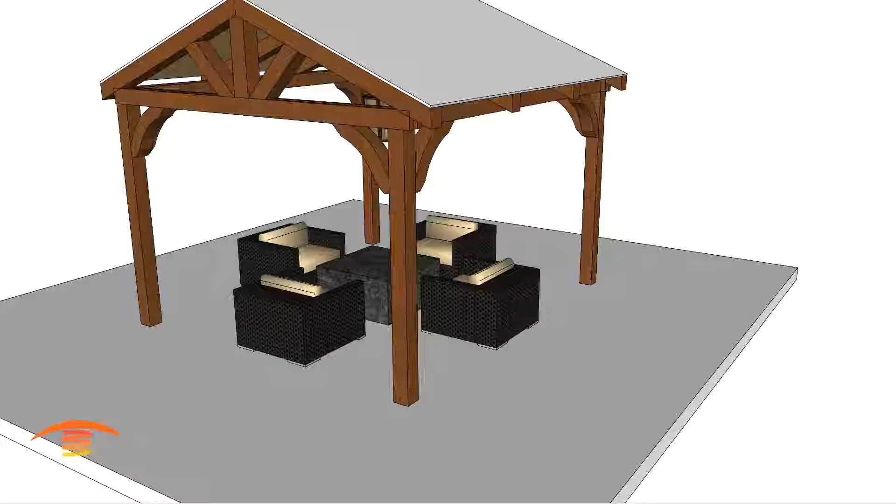Today I'm going to show you this relatively simple but yet elegant design of this residential structure. And being that it's simple and elegant, it has a little bit of complications that I'd like to show. So let's go ahead and see what we have.

First of all, our dimensions. You can see here we have 12 feet by 10 foot 7 and 15/16 of an inch. The bottom edge of, I think these are double beams here coming across, is 7 feet 7 and 7/8 of an inch off the ground. And then the overall height of the structure here at the bottom edge of these pieces here is 9 feet 7 and 5/8. Sorry about that, that ridge line is what I'm talking about. Let's go ahead and turn that off.

So the first option would be to place a couple of units on these outer edges. And this is where the issue starts to become a little bit of an issue. So the main issue that I have is making sure I meet clearances to combustible materials. And these braces here on the edge, they're decorative, but they're also wood, and do present an issue with this dimension of a patio. So let's go ahead and look at what that issue really is.

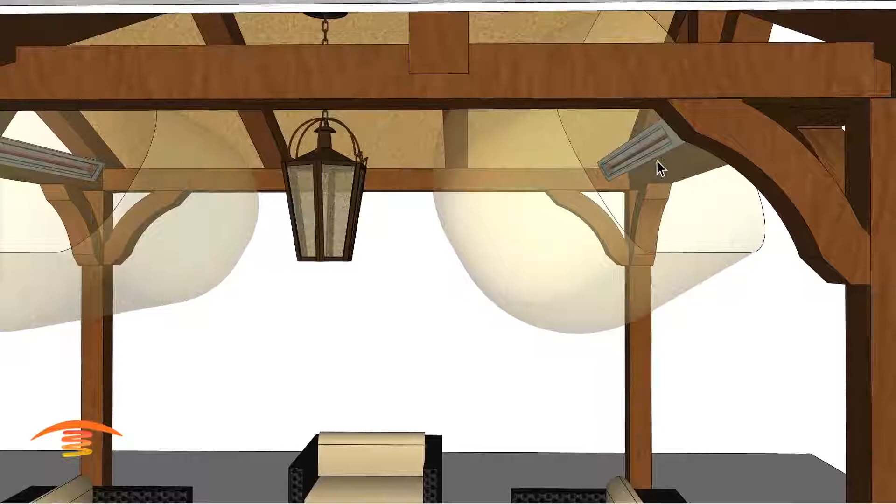So of course, above the heater, well, I have these turned here, but let's skip that for a second and we'll come back to that. Below the heater, I need to maintain 18 inches from the edge of the heater to any combustible. So I think I have these at roughly a 55-degree tilt from pointed straight down. And while that might look okay, it doesn't function correctly. So I'm going to turn that off, but I just want you to see that we do meet the clearances.

So here, let me turn that off, and let's look at the ray itself. So the ray is a light wave, and just like any light source, it emits out from the device. This is a heat source, light ray, infrared. And so as you can see here, I am not really capturing the space that I really need to capture. So let's see if I can reverse what I had here.

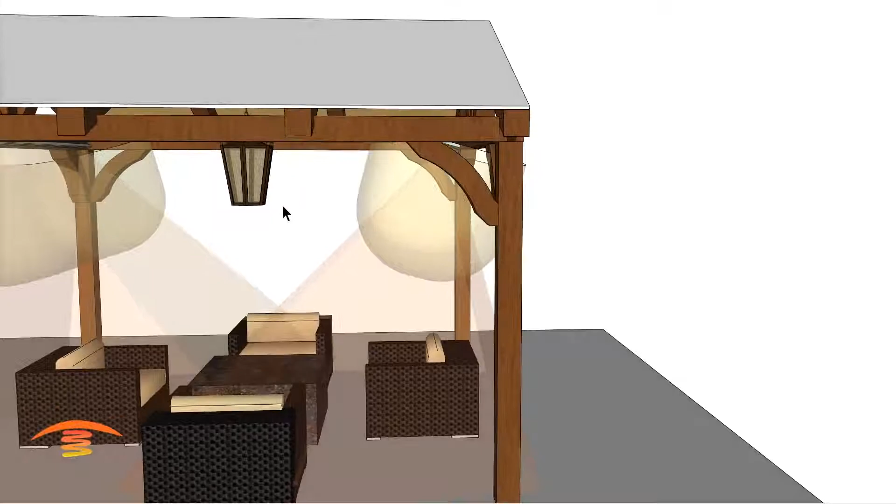Give me 1 second. So this is a 15-degree angle, and that would work well in the patio itself, but I have the issue right here, which is I'm not meeting the clearance to combustible with these decorative braces, so that presents an issue. So the only way I can get away from that is by moving the heater further inwards. That's not the only issue.

The other part of this is that this client is in a very cold winter climate, and so I have these at 4,000 watt units, and I don't think that would be sufficient for this space in such a colder climate. So I'm going to turn this clearance below off, and I'm going to put in 2 more units. These additional units are mounted the same way.

I think the clearance is still an issue below, so let's check that out. You can see that even at this wider edge, I'm just nipping these edges here. So yes, that is still an issue technically. You could go with possibly a longer bracket.

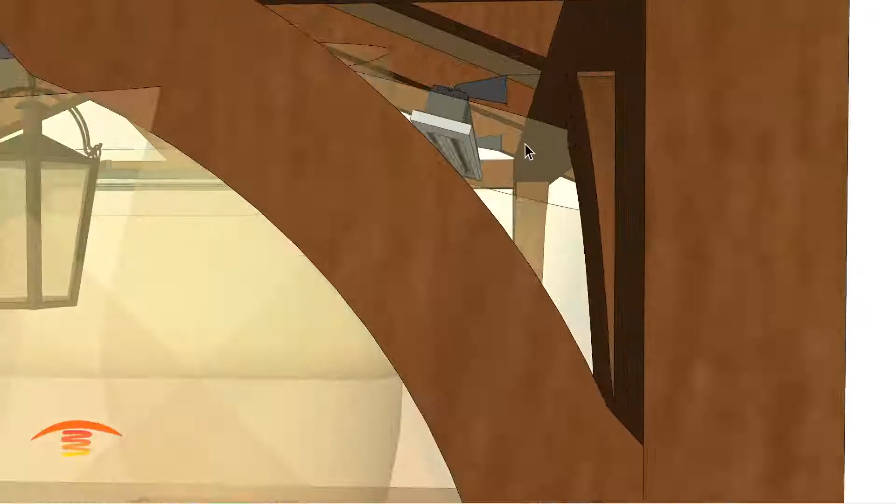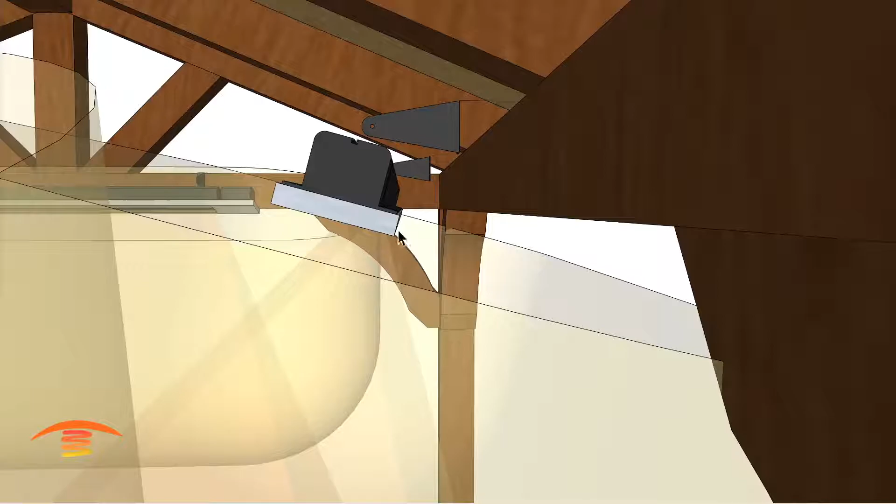I actually have these brackets extended, so you'd have to get the extended bracket even to do what I'm suggesting here, and I have them set up at the very top of the heater, or at the top of the beam here, so that there's the possibility of getting this angle down without lowering the heater itself. So that's a 4-inch extended bracket there, I believe. That's what I have there.

But in any case, this puts a nice footprint of heat, but we just have that one little dilemma here. So let's turn that off, and let's see what if we put some hotter units. These are 6,000 watts. The previous model was a 4,000 watt, but the 6,000 watt obviously has the same issue, and we need to do something about that.

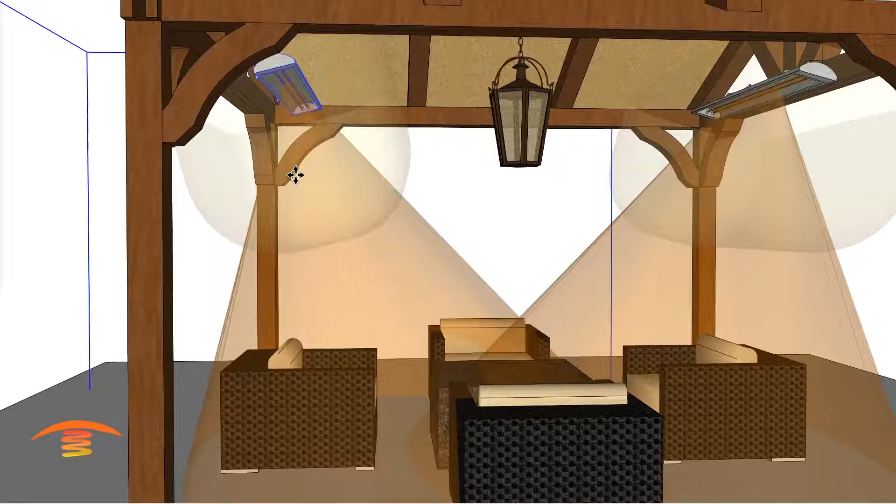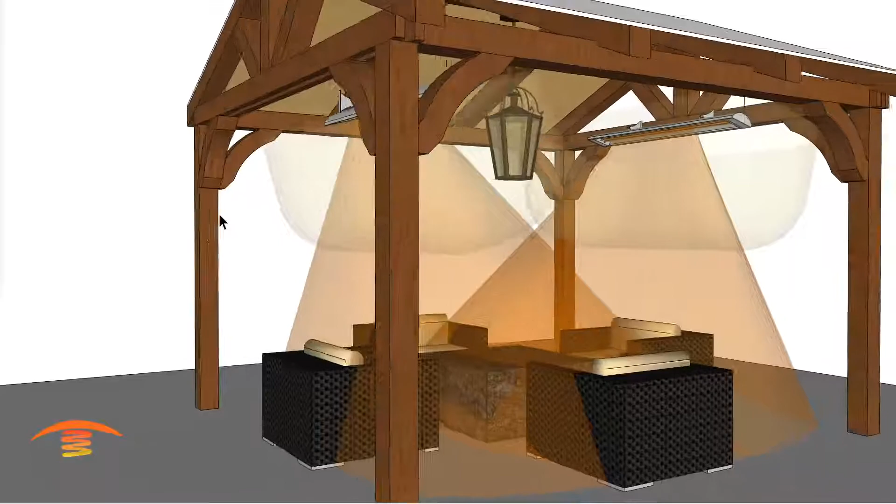And the only thing we could do, like I said, is to move the unit further in so that we're not in that area at all. So if I go, let's see, about 16 inches, I guess, would be good. And with the 16 inches, we're more than clearing that spot. Let's see what it would look like over here.

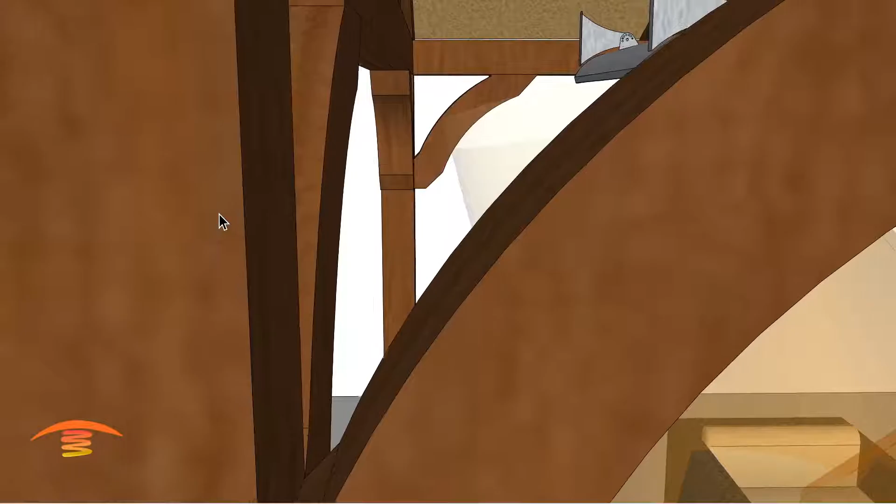I can probably go maybe even 15 inches and be successful, but now our mounting wouldn't really work over this edge here. We'd have to hang the heater from a bracket above, so that would be the proper way of doing that. And then also we may not need to place this angle at 15, maybe only 10 or maybe 5 degrees, because we're having a lot of overlapping here in the center, which I haven't moved this one over, but let's just go with that 15 degree move.

I'm apologizing, this is going to be a very long video for such a simple application.

But so yeah, we have a 15 degree move, or 15 inch move, but you can see all of this overlapping on a very hot unit here. So again, I would want a hotter unit if I could have it, and then have a control system where I can dim it down, but I have that clearance issue. So mounting it from the ceiling, maybe on some extended chain, or you can modify the bracket and add an extender piece onto the bracket itself, would be useful. So that would be another option there.

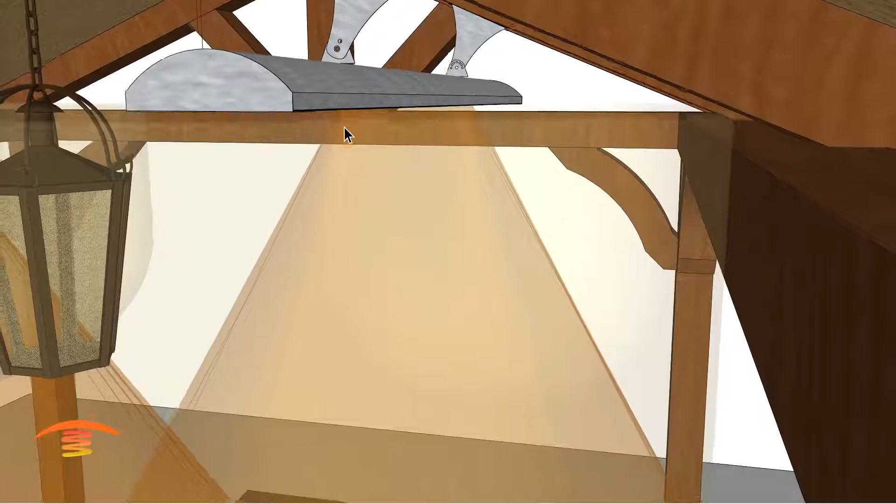And then of course I have another option where you can place the heaters this dimension. These are again our 6,000 watt units. I'm meeting the clearance to combustibles, I believe. We have a little bit of an issue right there at that edge there, but this is just 16 inches over from this edge, and then pointed straight down to the ground.

You can see I've placed this lamp here. I'm not sure if the customer is going to have some type of chandelier in the middle or not, but this would work out fairly well. I'm not getting the coverage from this 12-foot length here as I would like to, but that might be the best we can do with an electric heater.

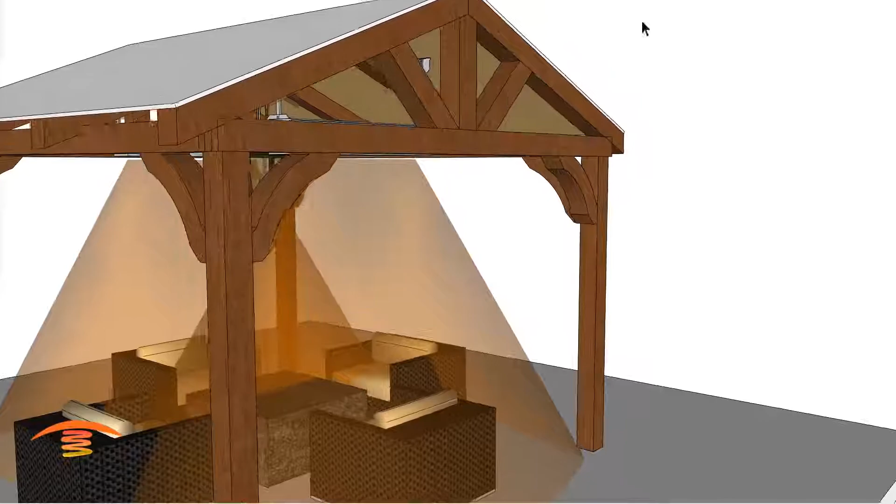And then also the final option would be to place a gas unit. And there's nothing wrong with the gas in this application. We have plenty of ventilation up here, so it would evacuate very freely. Now if it was a windy situation, I would recommend not using the heater above 12 miles an hour. However, you can see that we're not hitting these outside chairs very well with the two gas units like this. So that's just another thing to consider.

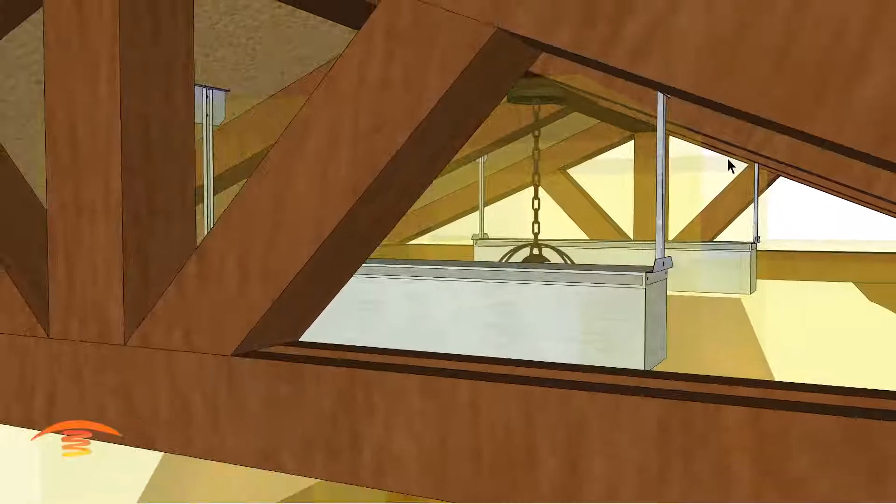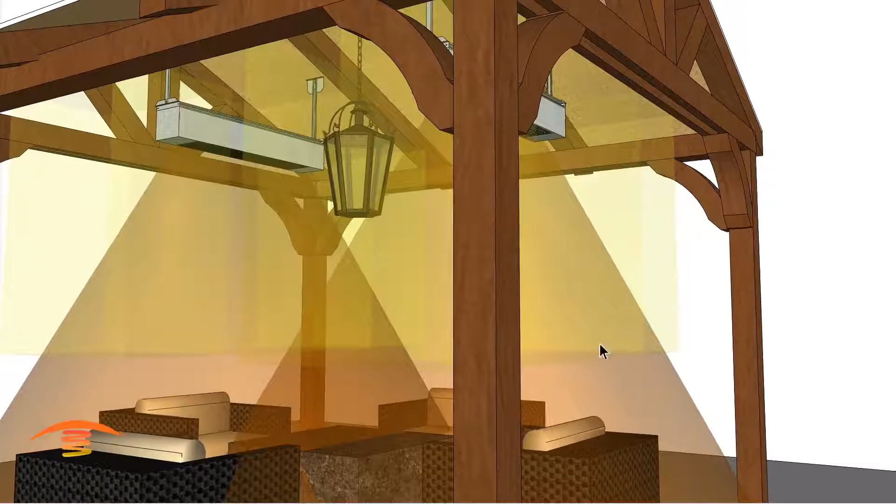But what we've got here is we have a 13-inch clearance above the heater. Let me just tap that on. So the 13 inches is above, and I'm coming from this edge right here, not the mounting point of the bracket, down to the top of the heater. And then we have 24 on either side, and I believe this is 18 from the back edge here. And it also goes down, but we're not concerned about that in this application here.

So in any case, there's a few options that we can recommend. I probably like this option the best, which is the 6,000 watt dual element mounted in this configuration, although we're still not capturing these outer chairs as well as I would like to. So if this support was changed, altered, made out of steel, or maybe eliminated some way, then we wouldn't have that issue at all. We can go with any one of those different options that I mentioned.